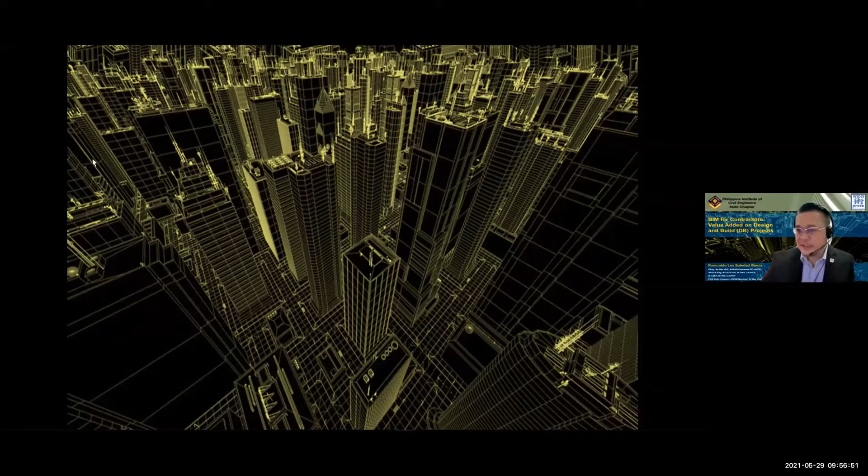Okay, again I'm Romualdo Lex Garcia. I'll be your speaker for this session. In addition to what Ma'am Marilu mentioned, I am currently the BIM manager. I have 15 years experience in oil and gas EPC projects, but I started actually as a shipbuilding and offshore design engineer, more on structural steel design. And eventually, I was able to gain experience not only in design, but also in structural fabrication and 3D modeling. Of course, we've been doing our design ever since 2006, using 3D softwares, although it varies from project to project, but we're emphasizing that one.

As we go along and progress in our career, we are able to experience how to handle a project and eventually develop more appreciation on how we're going to deal with various kinds of projects. I am a proud Agustinian. I graduated in 2005, and although I was a shipbuilding design engineer, I decided to pursue a Masters of Engineering in Structural Engineering in 2014, before I was offered a job in Malaysia as a senior structural designer for the first tension leg platform in the Sabah area.

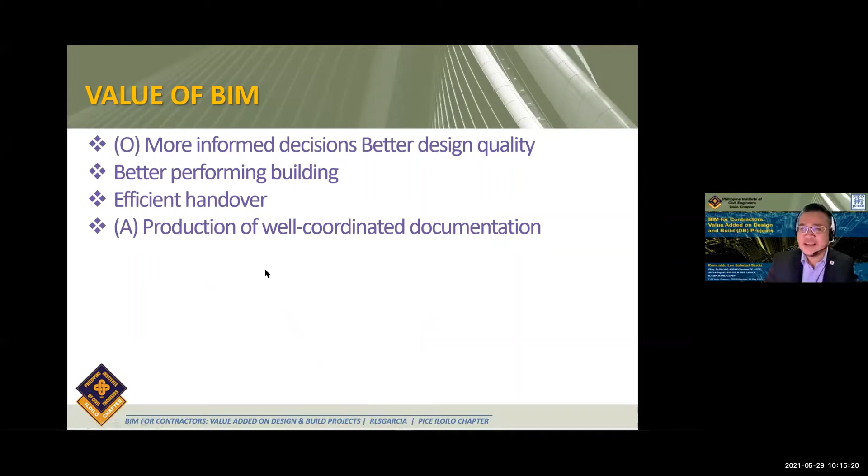Then, of course, efficient handover. If you have the CDE, the common data environment, the gathering of information from the start to end of the project is really, really efficient. Unlike the traditional practice, where gathering of info is really time consuming, so the efficiency is really low.

Then for Architecture, of course, the production of well-coordinated documentation. These documents are termed the drawings. So if you have a very good model and a very good site concept, you can create very good, well-documented, well-coordinated drawings.

Then you can also allow model checkers to assist quality control. Most of the time, that's why we're emphasizing the CDE. Our 3D model is accessible by all those professionals we highlighted earlier, but of course, limiting the access rights. If I'm a structural engineer and I need to see the architectural model, I can do that within that CDE.

So I can make a better and sound decision, especially on moving these columns or changing the sizes of these beams, and I could communicate well with other parties. So that is one good thing with this.

Then, study multiple design alternatives - this is the conceptual aspect. Then of course for structural, same thing: good structural drawings, integrated modeling analysis.

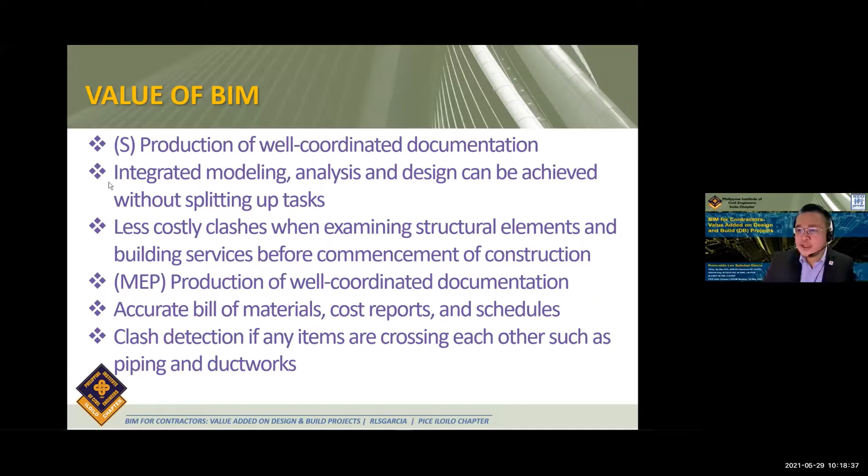So again, how did BIM evolve? It started from handwriting, then evolved into 2D CAD. During my university days, we were really fascinated with using AutoCAD during the second semester, after we struggled in our drawings or templates using handwritten hand drawings. Then eventually this evolved: 2D CAD, then Autodesk was able to offer 3D CAD. But this doesn't have any properties, so it is not really a smart object, just an object.

But eventually it evolved into BIM, where the lines could represent a beam. If you click on this beam, the actual sizes like H-beam 130, 150, or the angle, the I-beams, the channels, the purlins - it is really with properties. So that's the goal. Once you have that modeled with properties, definitely if your model is correct, you can generate a very good schedule, a very good material takeoff. So this is in brief the evolution of BIM.

So some of the advances, this one I presented last time: BIM coordination room, digital fabrication, 3D imaging using the LiDAR scanner, light detection and ranging. This captures as-built conditions for alteration works, or we could use this LiDAR scanner to compare our BIM model with the work in progress on site.

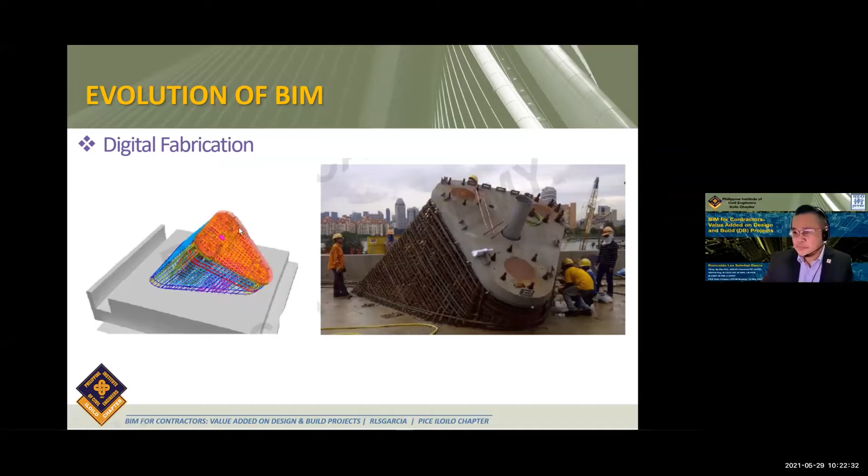Next, of course, we cannot pass through the BIM fundamentals without going through the BIM maturity levels. We have level 0, level 1, level 2, level 3, and level 4. I presented this to our company because many companies in Singapore are still not yet fully applying or adapting the BIM level. It's quite funny because even the managers were really dumbfounded. Only level 2 is quite difficult to reach already.

Because at level 3, you're already utilizing the cloud CDE, the processes, and 6D. So if your company, or the knowledge of your staff, is still in 2D and 3D, at least you're already in level 1. But if you're using BIM models, you're partly in level 2, but you need to utilize it in 4D and 5D to be a full-fledged level 2. So this is the main goal, the sustainability level 4.

As emphasized here, achieving digital sustainability through integrated BIM and smart FM, or facilities management, within an operational digital environment, or ODE. So this FM means you're utilizing your model to detect the level of gases, the level of liquid or oils that your plant is storing, or in houses, in condominiums, or what we call HDB here in Singapore.

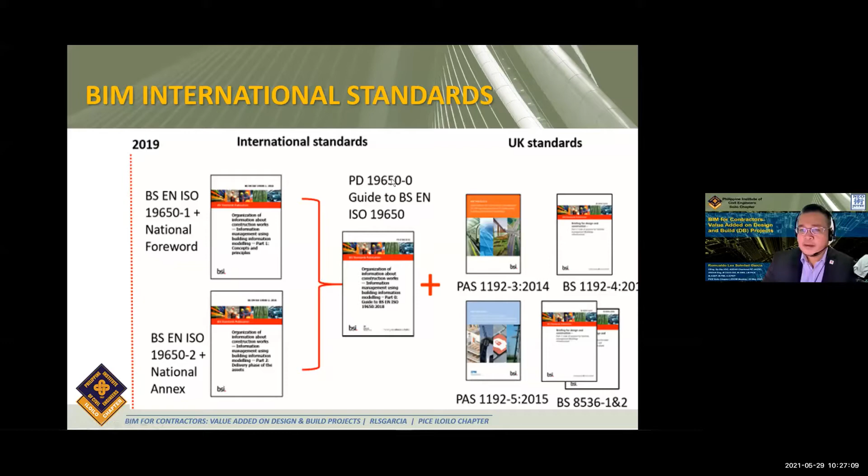So this ISO 19650 standard is an international standard for managing information over the whole life cycle of a built asset using building information modeling or BIM. It contains all the principles and high-level requirements as UK BIM framework and is closely aligned to UK 1192.

So if you're really interested in BIM, there's still so much to learn in this part of the industry, so try to be acquainted with ISO 19650.

Of course, Singapore has its own guide. They really provide everything for BIM practitioners so that they will no longer have much question. They have provided the BIM guide, and in general, the BIM essential guide for the BIM execution plan.

When I prepared the BEP, as mentioned earlier, this is the reference I used, covering the consultants, the architect, the contractors, etc.

So in today's presentation, I will be dealing more on the BIM Essential Guide for Contractors, and later on some inputs on DfMA, or Design for Manufacturing and Assembly. Just a short clip. Okay, so here's the roadmap.

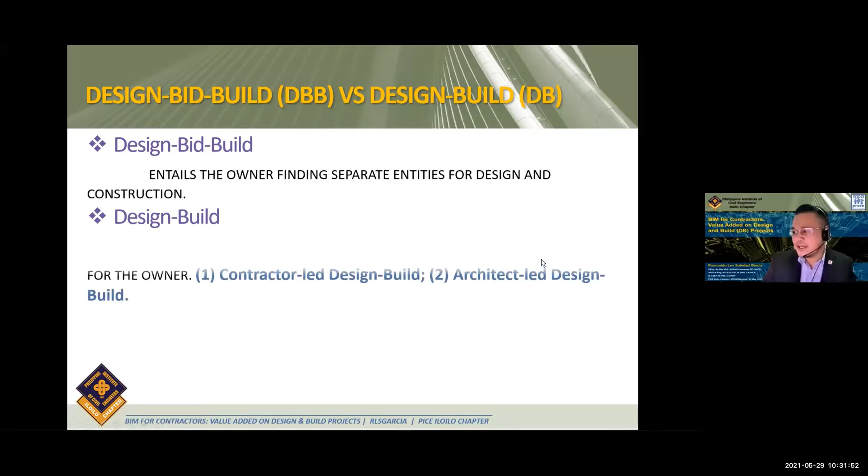But commonly now in Singapore is the design build. I'm emphasizing this especially to students — shout outs to our student participants there — you're going to meet this a lot when you're doing your work already as a professional.

Okay, design build combines the design and construction team with one point of contact for the owner. So in Singapore, we have two common design build setups: one where the contractor leads the project, and the second where the architect leads the project. Normally the architect here is the consultant, and they are the starting point of a lot of projects here.

So design and build is the method to deliver a project in which the design and construction services, again, are contracted by a single entity.

So it will be highlighted here in this next slide. For design and build, you've got the owner, then the design builder, which is normally a main contractor. Then if I am the main contractor, I will get a supplier or subcontractor, and sometimes I will hire the consultant or designers, but I am the main contractor — I'm the lead here.

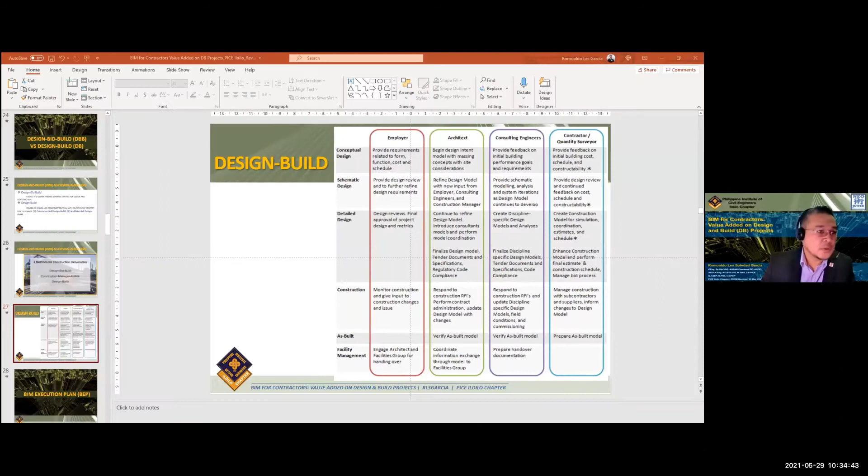Let me share a clip, but I think I forgot to share with sound. So let me close again. Then share. Oops, what happened? Then let me share with the sound on. Share sound. Okay.

So there are actually 3 different methodologies for design and building a project. The traditional method is design, bid, build, where you have an architectural engineering team design the project with the client, goes out for bid, and then the contractor constructs it.

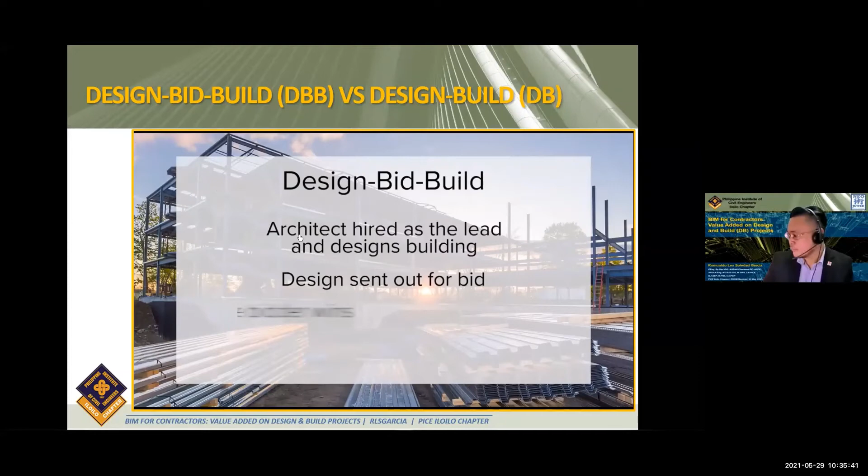The construction manager at risk is that the owner hires the architectural engineering team early in the design. They also hire essentially the general contractor, and they help shepherd the project through the design to value engineer and to get the most out of the owner's money.

The other is the design build method, where the contractor is the lead with the architect and engineer as a sub to the contractor, and the contract is between the owner and the contractor.

There are pros and cons to all 3. The construction manager at risk has been used quite a bit here in Virginia because it brings the contractor in early,

and what then they do is then they bid out to subcontractors. So we have their expertise on what's constructible and what's not, and trying to save the owner money. But then it's pretty much goes through the same design, bid, build flow.

So it was highlighted there, the same explanation that we had. The design and build, you only need one party as the main focal point before the owner. But the traditional one, design, bid, build, yeah, you need to contract a lot of parties.

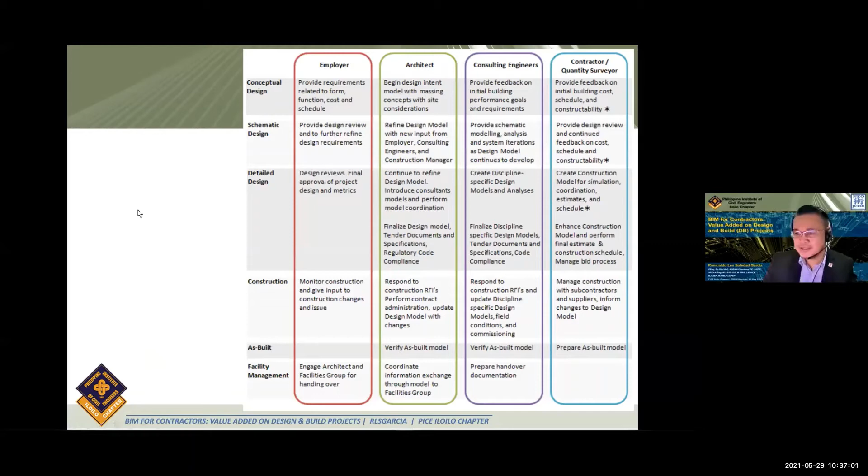Okay, so for design and build project in Singapore, these are the common roles and during the certain stages.

So we have this conceptual design, schematic design, detail design, construction, as built, facility management. So the role of the employer,

stated here, provide requirements. Also during the schematic, they do the design review. During detailed design, they do the design review as well and the approval.

So it's simply highlighted here that it is a smoother loop, meaning during our design build process for the

BIM workflow, especially employer, architect, consulting engineers, and contractors are more or less involved. Yeah, it is emphasized here, more or less involved during these stages of our project.

Again, BIM is starting to finish. Okay, from start to delivery or submission, even to the FM facilities management.

Okay, so we will not dwell more on this, but if you can see, even contractors are involved already in the concept design. How? They are providing feedback on the initial cost, the initial schedule, constructability.

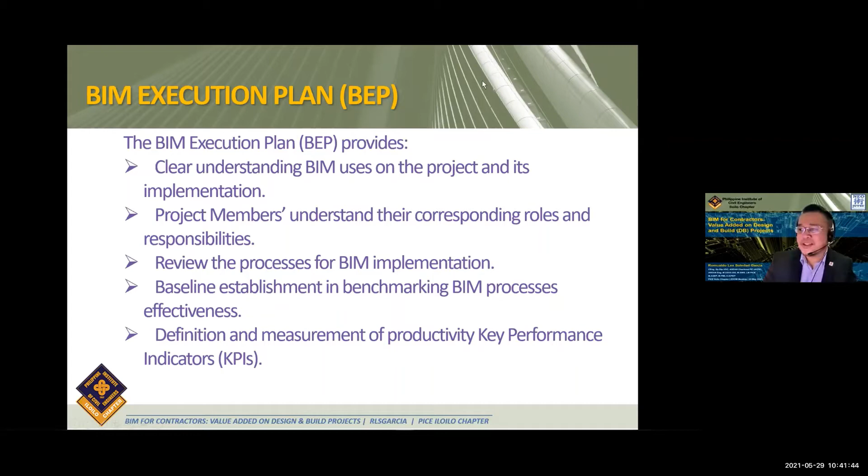So of course, since this is related to the digital aspect of the project, many info on PC specification, what kind of softwares based on the specs provided by the owner or the client should be included. So let's dive in here.

So let me share this one. Okay, so by now your screen should have this document. So this is our BIM execution plan, the BEP. This one we issued and accepted last July 2019. Let's go into the contents.

So for the content, we have the overview, the project information. We need to highlight the goals and the uses, the key milestones, the key project contacts, the BIM organization, and the basic org chart.

Usually, because it is very common practice here in Singapore and also in other parts of the world, we have subcontractors or freelancing or subcontracting modelers. So more or less the important thing, if you prepare this, you should know who's the BIM manager, who's the coordinator for your contract, and who's the system administrator if needed.

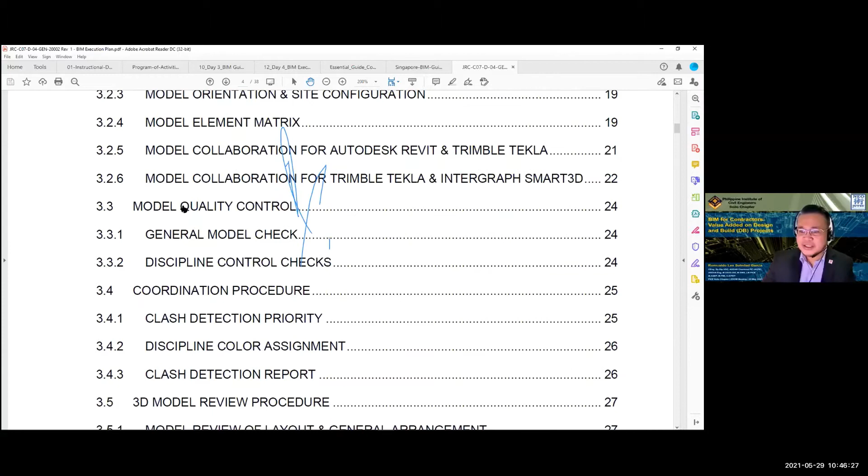Yeah, we need to have this model element matrix, collaboration, discipline control checking. So these are the QC, quality control. We should know also how to check, what to check when we receive these models. And of course, it is being highlighted when we are doing a BIM project.

We are really selling it as a well-coordinated project. So we need to have a coordination procedure on the clash detection priority. You can run a clash detection sequence and run a report, but if you have a very huge project, it will take a lot of time and a very strong PC. So you need to be very wise.

You need to be wise in selecting this clash detection procedure. So you have to prioritize. Then also the color assignment, the report, sample reports, you need to highlight more or less what you want to be done during the actual execution of the project. Then, of course, the model review procedure. Some projects do not require this, but for this certain project, the client requires a 3D model review procedure. So we need to have the review layout and arrangement, design considerations, etc.

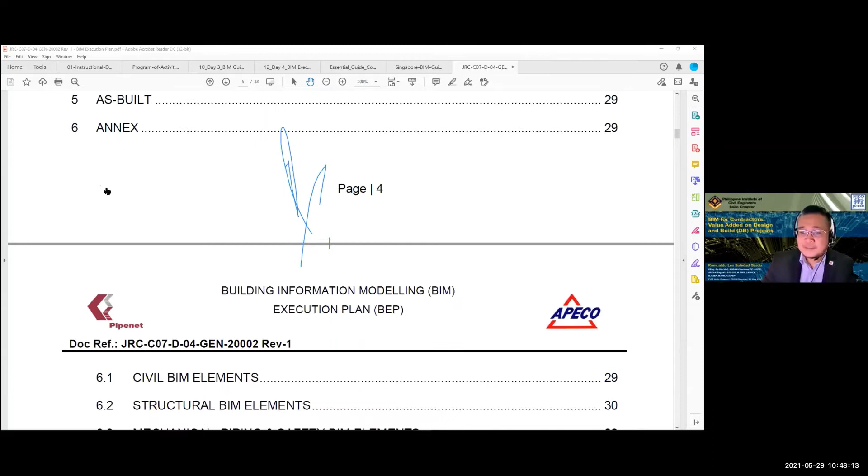This is the overview of the project, a description of what this project is about, what the goal is, and who are involved. Here we have mentioned that we're going to use a certain software and conduct model reviews at 30%, 60%, and 90% completion of the project. We need to highlight it here. This info came from the client, but we need to incorporate it here because that is our goal, more or less, using this document and the softwares, to comply with this requirement.

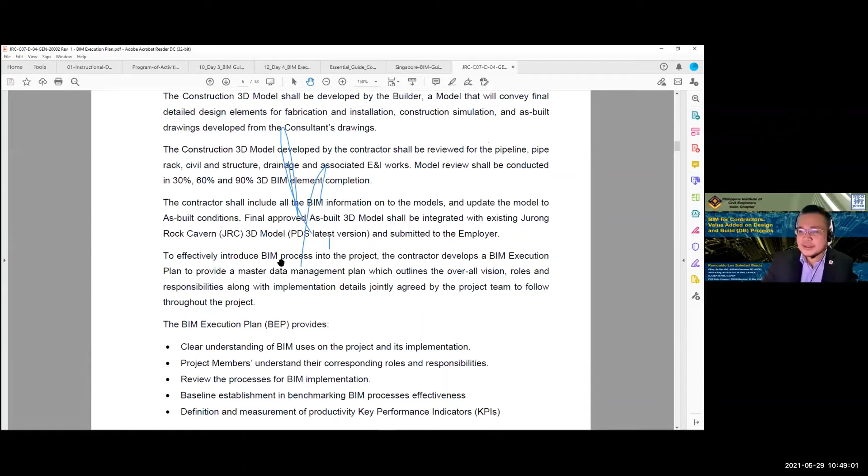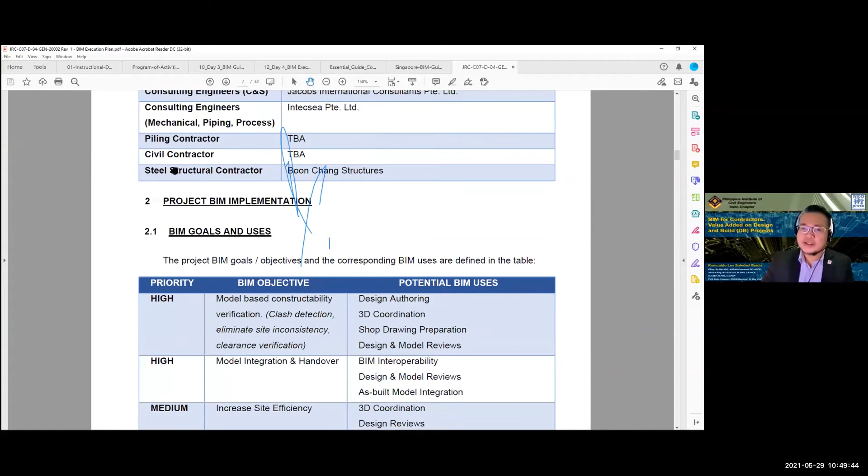Then you need to identify the consultants, etc., and also the BIM goals and uses. So this one, for example, for the BIM use, the goals and the uses, you have high priority on model-based constructability.

So the potential BIM uses are design authoring, 3D coordination, shop drawing preparation. That is just an example. Then one example of a low BIM goal and use is virtual site utilization planning and visualization. You're not really required to do that, but it is an add-on if you can.

So design reviews and phase planning. For example, if you have a Civil 3D model of your site, then you can do the cut and fill, and then analyze where to put your cranes, etc. That's one example, but for this project they are not requiring us to do that.

So we need to focus on those with high priority, meaning we need to focus on the valves, we need to focus on the detail of the structures because that's one of the high priorities. So here, the coordination, the shop drawings.

Going forward, we need to identify also the key milestones. So these are some of the key milestones that we have: now we have the authority submission, the implementation, construction phases, etc. Just a table, so at one glance the team or the PMT could identify what the milestones are.

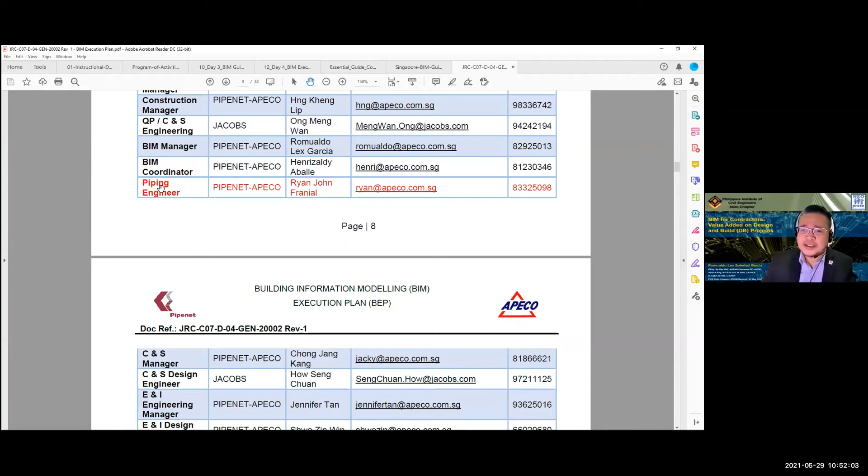Then of course you need the contact info: who are the director, the assistant director, BIM manager, etc. Also who are your consultants, MEP, C&S, etc.

Then the org chart, again just highlighted here only the manager and coordinators because we are outsourcing. We are giving the modeling of the majority of our structures to our fabricator. So here only the BIM manager and the coordinator are mentioned, of course with their corresponding role.

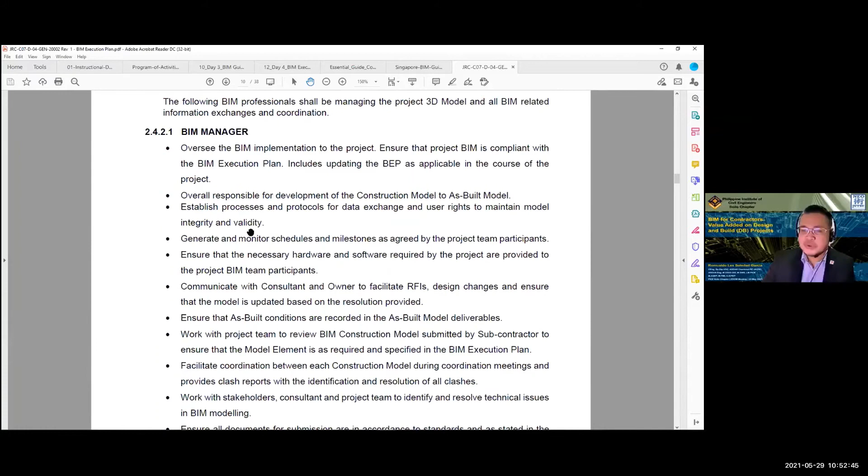Then here in sentence or paragraph form, you need to identify what the roles of a BIM manager are. These are the roles of a BIM manager, you should indicate that. Same in your project brief, you identify the PM role.

Also the coordinator, for example, utilizes the BIM to perform drawing and design work, because most of the time the coordinator is also part of the modeling team. They facilitate coordination between the construction model, and also they conduct collaboration exchanges of the model data between the consultants and contractors. So also they are assigned to do the model review.

And for our project, since we are going to have a server, we need to have a system administrator because we have specific software for this project. So we need to have an admin. So these are the roles, we need to identify that as well in our execution plan.

Then the workflow. We need to provide a very good picture of what's going to be the workflow in our project.

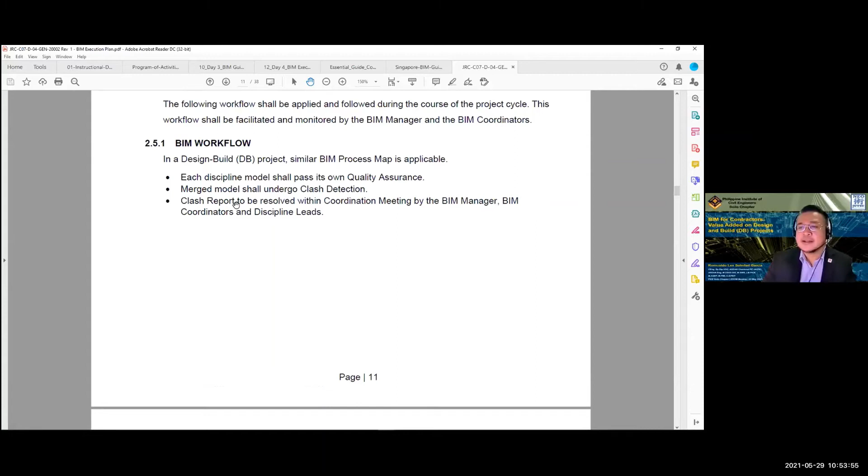So here, highlighted in a design and build project, similar processes are applicable. Each discipline shall pass its own QA, must undergo clash detection, and clash reports need to be resolved within a coordination meeting by the BIM manager, coordinators, and discipline leads.

This is the same as mentioned in the statement above. So internally, you proceed to the merge or integrated model, then conduct a clash report or clash checking, then have the coordination meeting, eventually leading to a coordinated model for construction.

As long as these clashes are not resolved, your coordinated model is not 100%. So you need to go through the same process again until it reaches no more clashes.

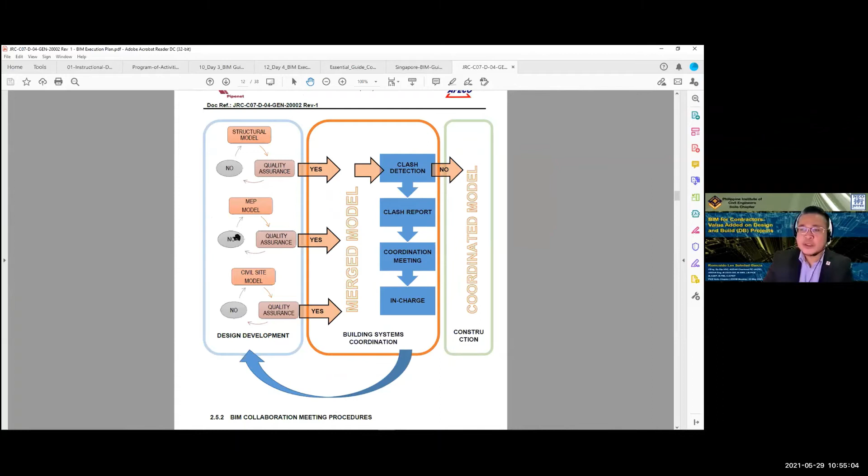That's the flow. So this document, again, BEP is a live document. You can update anytime if needed. For example, we don't need an admin, we need only a software modeler or a backup one, so we need to identify it here. Or we need an additional coordinator. You update as well.

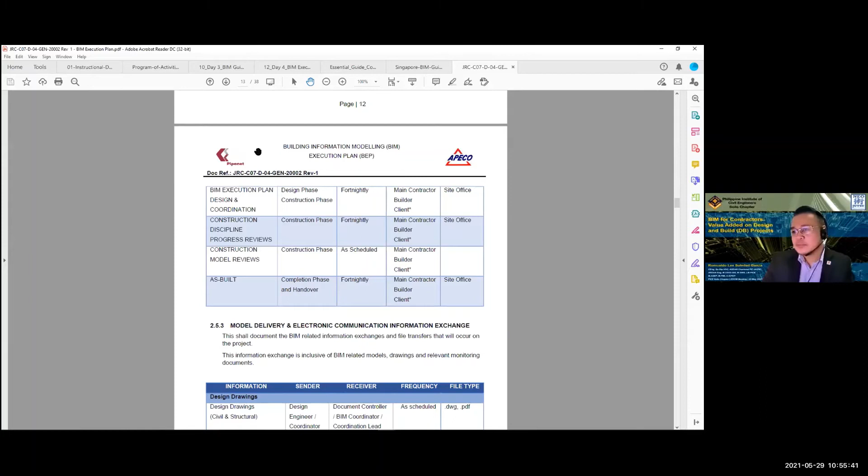So here are the schedules of the coordination meeting, the collaboration meeting. Fortnightly, every 2 weeks mostly. You provide the location, etc., and identify the electronic communication information exchanges, the file type, who's the sender, who's the receiver, and how often.

Usually this is advised weekly, especially if your client is keen to see weekly progress, especially in your 3D model. Then you have to do it scheduled weekly. You need to freeze the model, then send it out. You need to include this in the BEP.

For the drawings, since these are really used by the construction team on site, they are usually received earlier. Then the model, although supposed to be ready, needs some clash detection, etc. So these are scheduled separately, and the file types are different - maybe IFC, STP, or Revit, NWD - all for integration so we can conduct the model review.

Then of course, as mentioned, we need to provide the infrastructure requirements - the hardware, the workstation, and the server.

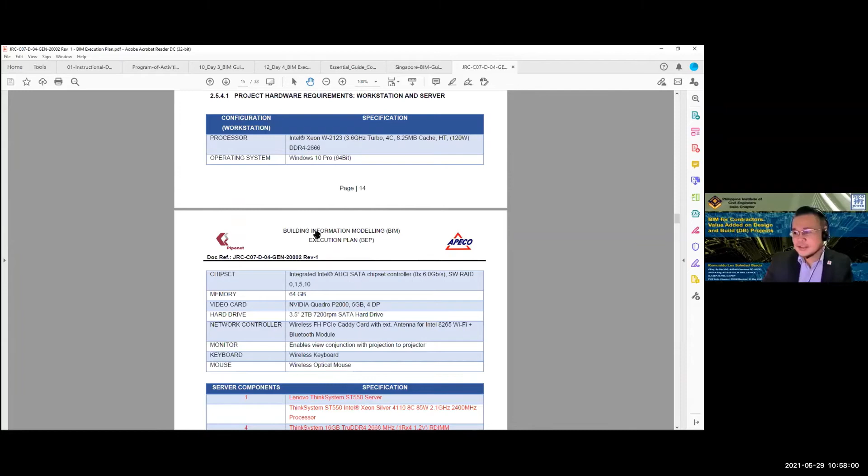Eventually, they select whatever vendor they've chosen. But as the BIM manager, we're the ones giving them suggestions on this, and we also decide on the server specs. It's really good if you're familiar with or have an IT friend you can consult with before contacting a vendor, so at least you have a better idea.

We also need to do a lot of research - if the Intel Xeon Silver is enough, or do we need a memory card for this server alone, or do we even need this server at all, and how many. Also, because the project requires a lot of software, you need to identify it here as well.

For this specific project, we use Revit 2019, but actually we upgrade annually. Then you need to have the format - we need to highlight the format because that's going to be used for data exchange later. For the MEP, we're using Hexagon PPM Smart 3D. For the analysis, we have CAESAR II and Pipesim. For the surge analysis, we have Pipenet.

For structure, we have Tekla Structures - it doesn't mention it, but it's supposed to be STAAD. We're using STAAD and ETABS for the ground, but it should be highlighted here. Then also for model coordination, what are we going to use - Navisworks, Tekla, or for the fabrication drawing - Navisworks, Tekla, Revit, etc.

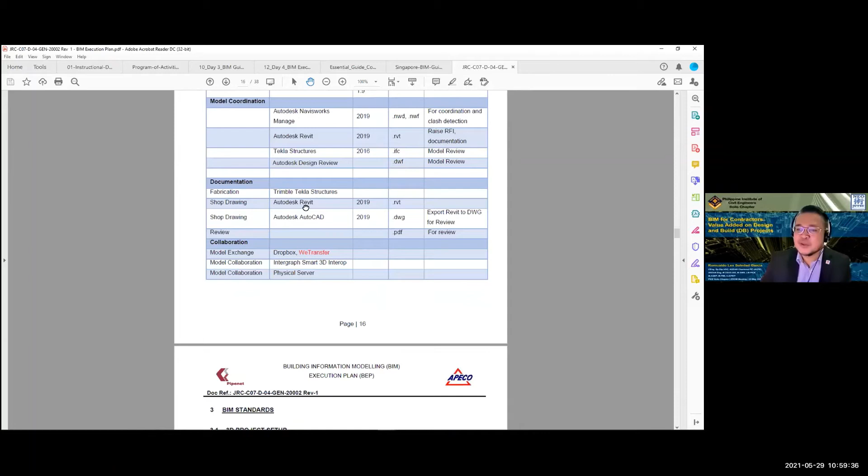And for the exchanges, we can use Dropbox, WeTransfer, Interop, and the physical server. So whatever software you're going to utilize in your project, you need to have it here, enumerated there.

So of course you need to set up a standard naming convention. Most projects have this, how to name your project. Then you have this code for electrical, HVAC, etc.

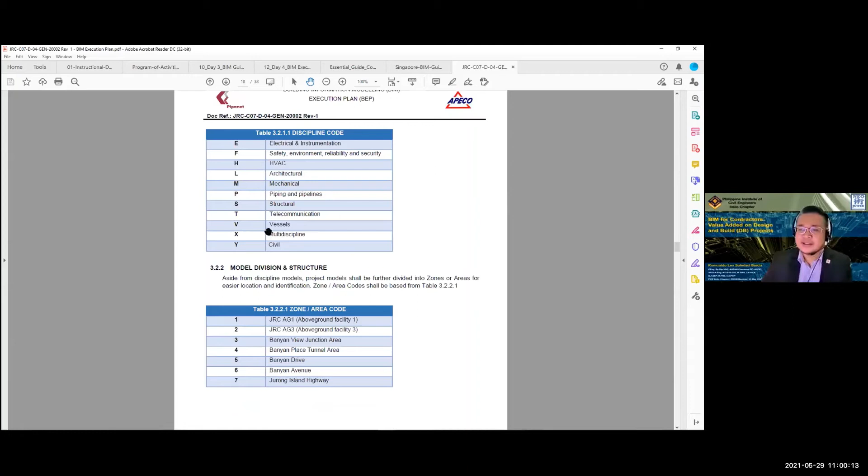Then for the model, you have the zoning, so that you won't have a very huge size model during your integration. Normally one model will have, in our case this is the old one, we had 7 during that time. But I think we're nearing completion, we already have 12, around 12, because we have additional ones.

Sometimes we encounter VO, or variation orders. So yeah, this is one of the most important things.

If you're using Revit especially and Tekla, you need to have the project base point. So during integration you will have a very easy bolt-in of your various models using various softwares, because you have a specific project base point. This is identifying the northing, the easting, the elevation, and the angle from true north. So you need to have this here.

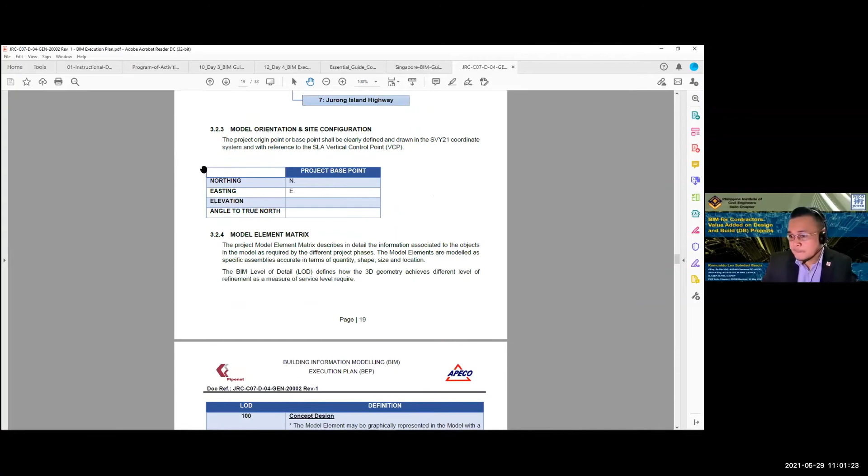Then the model matrices, the LOD. These are just descriptions of what is LOD 100. So LOD is level of detail, BIM level of detail.

So if it is only 100, normally that is during concept design. During schematic design you have LOD 200. And if you're going to have the detailed design, it's LOD 300, and so on. So for construction, most of the time, especially for those models with rebars, for example, and your client requires it, you need to have 350, LOD 350. You need to show those rebars.

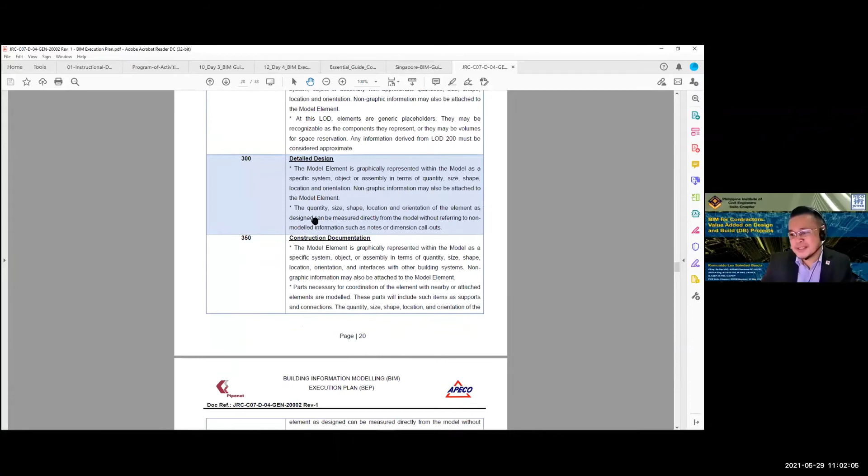Okay, going through. So these are the procedures on how we're going to collaborate between Revit and Tekla. So as the lead of the project, you should know how to operate this, and place it here in this document.

So the linking. We're using Tekla, and also we have Smart 3D, a different software again, different for piping, different for structural.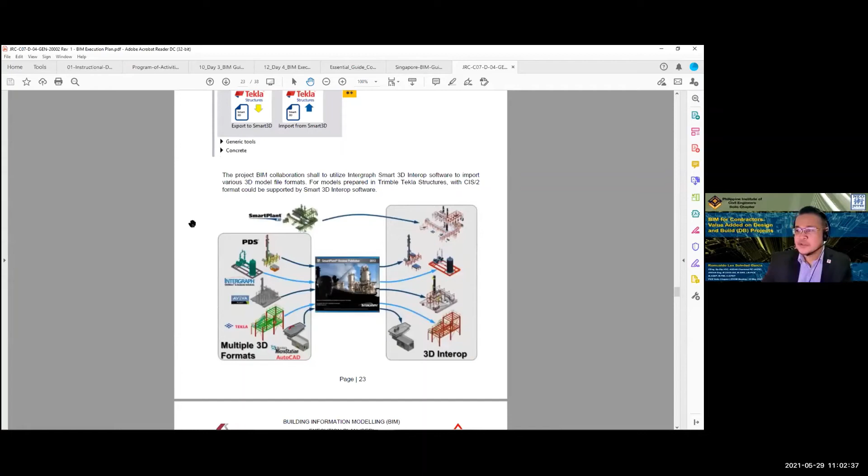So the model checking, we need to have identified visual check, interference check, etc. And the control checking, you need to have that specified as well. So the clash detection priority, this one I explained earlier.

So for example, you have the civil model, the structural model, MEP. Civil normally these are the substructures, the pile caps, the piling, or the slabs. Then you have the structural model, like the structures. We call this civil the substructure. On top of that are the superstructure model, which we then merge with the MEP.

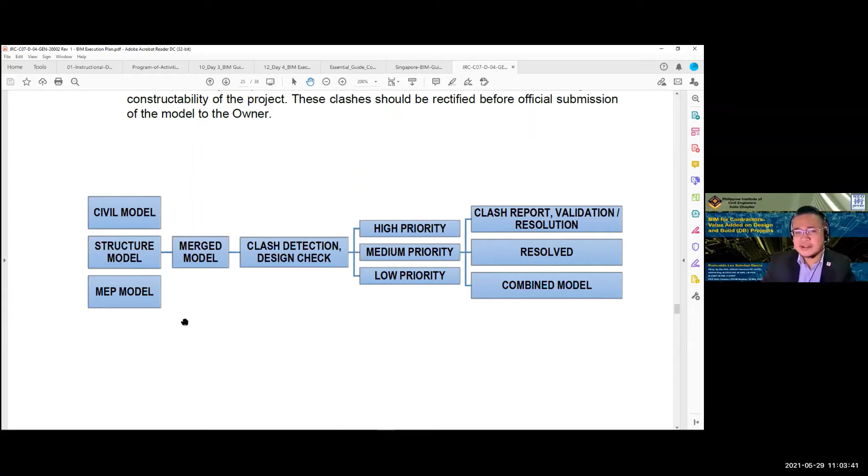MEP is mechanical, electrical, and piping, but some projects call this differently. Because some pipings, especially on large projects, they differentiate the HVAC if they have it. But for the piping, they call it services. So that's part also of your model checking.

Then you merge, then you have the clash detection, design check, then you identify which ones are the priority, medium, low. Then you have the resolution and you combine into your construction model, or the federated model, as we call it.

Then of course the color coding, this is quite normal in any project. And okay, this is the report.

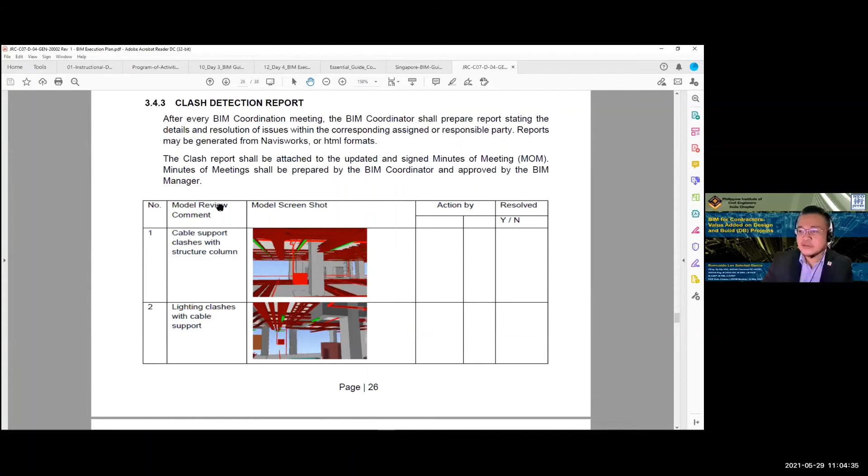You need to, especially our client, they really wanted to know what's going to be your format when you're going to have the report. So we need to come up with this one, even though we haven't started yet. If you have a lot of projects already, then you can have your own template, company template from your PMO, project management office, so you can have these templates if needed.

So these are the sample clash reports and how it's going to be resolved. Some of these descriptions, hard clash, then you have the clash point, usually coordinates. Then normally we have the closeout, but for our closeout reports during model review, we only have two columns for screenshot 1 and screenshot 2, then our response. Normally that's what we do for the project.

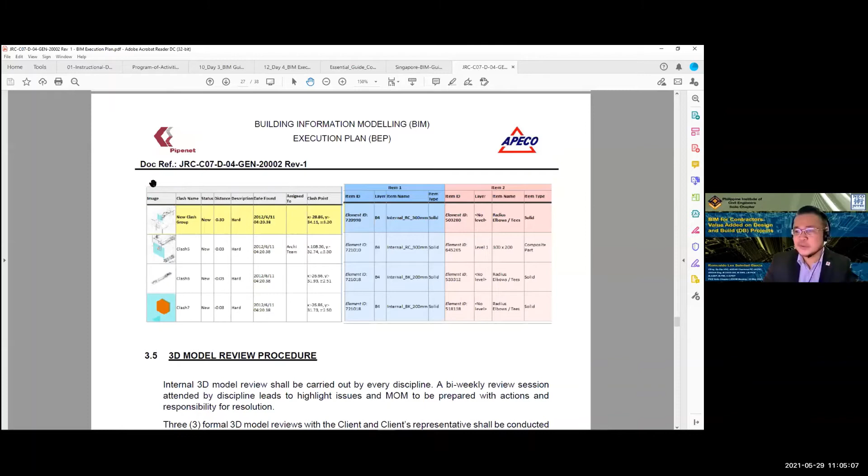And it was accepted. So the model review procedure, you need to identify as well. So a lot of this. Then zoning. So that's it, you have a lot of info within this BEP.

So this part here, these are the color coding normally. Okay, you have the text for your naming, agitator, blowers, buildings, columns, etc. So that's it, you need to identify.

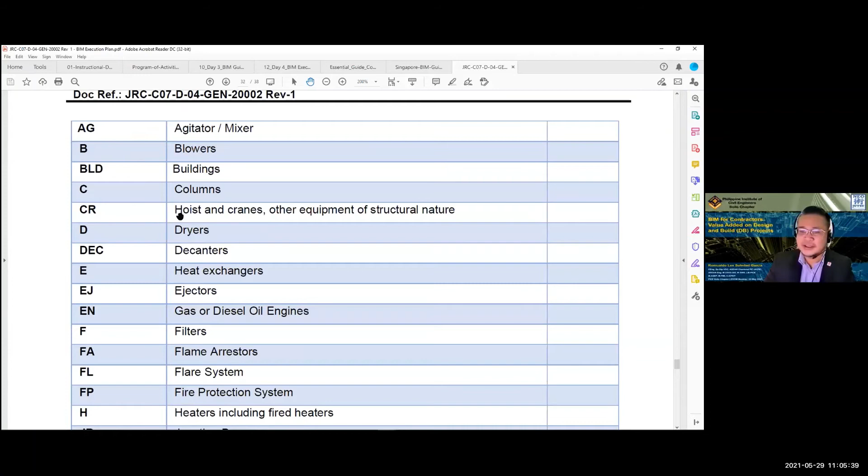These are appendices. Some of this we can copy, or we should copy, refer from the Singapore BIM guide. Hopefully we can create, I think it is in process, we have the Philippine BIM guide being prepared as well.

Okay, so much for this. Let me share again, go back to our slide. I hope everyone is still awake. Okay.

Okay, you're good na, engineer? No, we're still midway. All right. Okay.

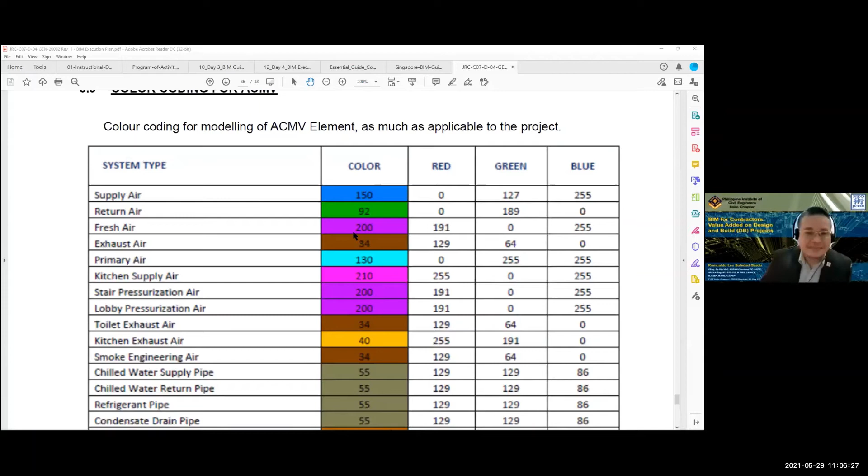So, one example of that is for the BEP. Then let's proceed with the BIM VDC workflow for a C&S design and build project.

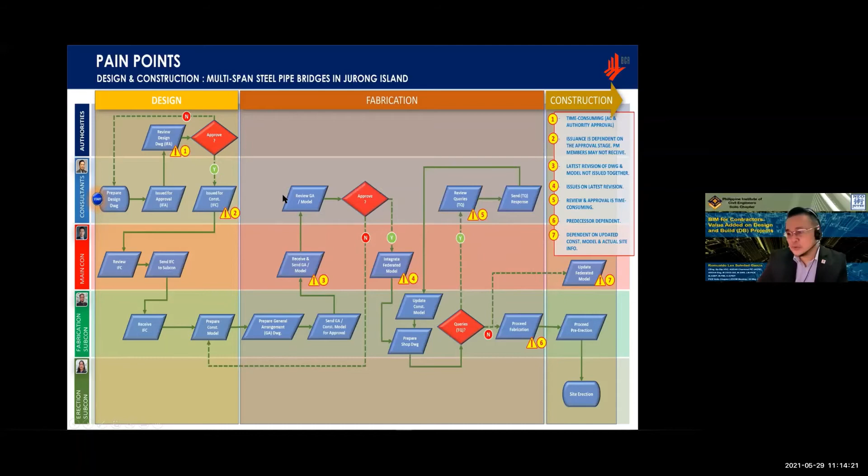So again, just sharing with you, this is the workflow of our design and construction of multi-span steel pipe bridges, to proceed. That is actually one of the activities when you're doing VDC. Take note, we're dealing with models, we're dealing with common data environments, etc. But as contractors, we could do so much more, but there are project constraints. Okay, for BIM contractors, here we go.

This is, I think I was able to share this before. So Philippines is not yet included in the adoption of BIM. A lot of organizations are already pushing, especially the PCA, Contractors Association, also in coordination with the DPWH. They're preparing. So many documents are being prepared already, a lot of proposals are being prepared already. Some of our projects in the Philippines are already using BIM, but how come we're not yet on the map?

Especially since many talents are already there in the Philippines. It is simply because some of the projects being catered to are abroad as well, and also some of our local projects are using talents from abroad. So that's why we haven't launched yet - we haven't placed our country on the BIM map. So that's one of our goals here, to educate even our young professionals, our students, our graduating students.

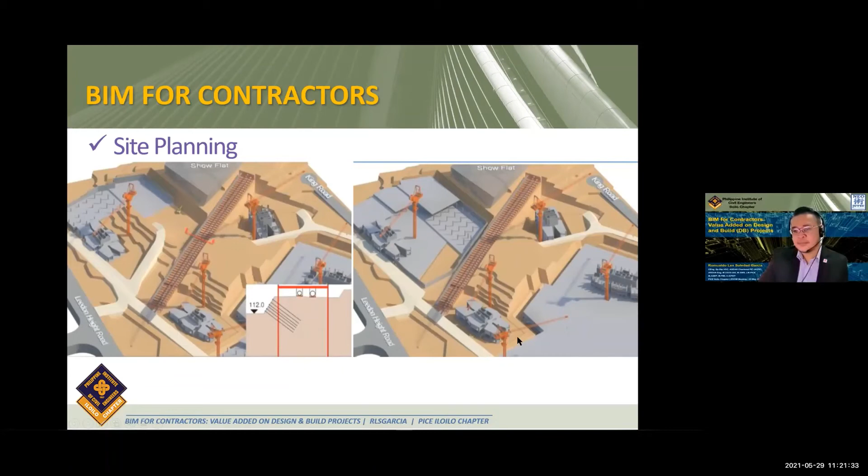And constructability review, of course - you don't want to waste your time doing reworks on site. So upon inspection of the model, maybe you can adjust, especially if you have this knowledge in construction sequence or construction.

That's why it's really a good thing, as highlighted by Sir Erdsan earlier - it's really the people. Even though we have these tools, even though we have this technology, it's still the people who are going to decide. If you don't have the knowledge that this could be converted into this, meaning the connection would be different, then you cannot suggest, even though how much you're going to look at your model, if you don't know this process. So experience really helps, knowledge helps.

But of course, efficiency would be increased if you utilize this software. But still, we're the main ones - the persons, the engineers, the architects, the MEP professionals. Okay, that is for constructibility review.

Another thing, construction detailing, of course - see, this is a product of Tekla. I think I grabbed this one from Tekla, yeah, because I'm really amazed with how detailed this rebar work is here. So of course you can generate very good documentation, shop drawings from these models because they are automated.

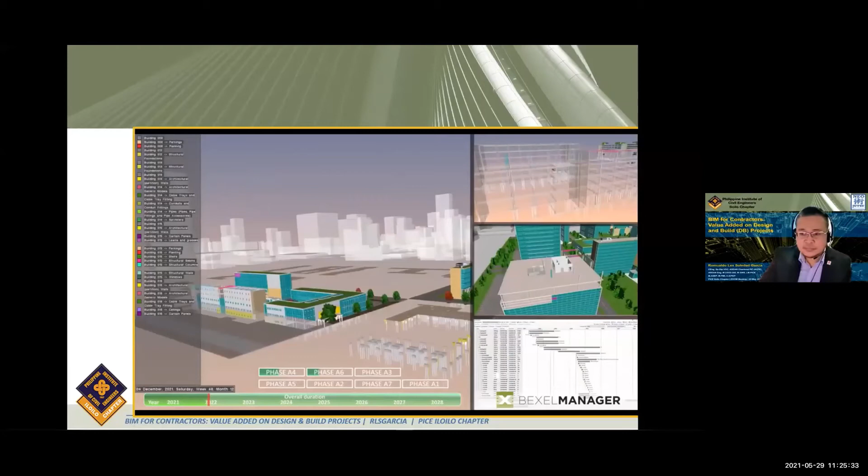Okay, this is using Bexel Manager. Bexel Manager is suitable for contractors and project management. We can have the 4D and 5D using this. So I'll just push forward, just highlighting some of the software that we can use.

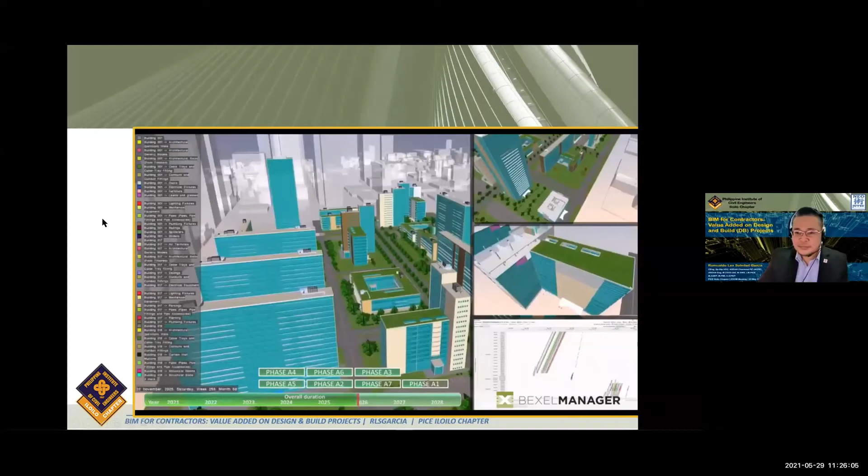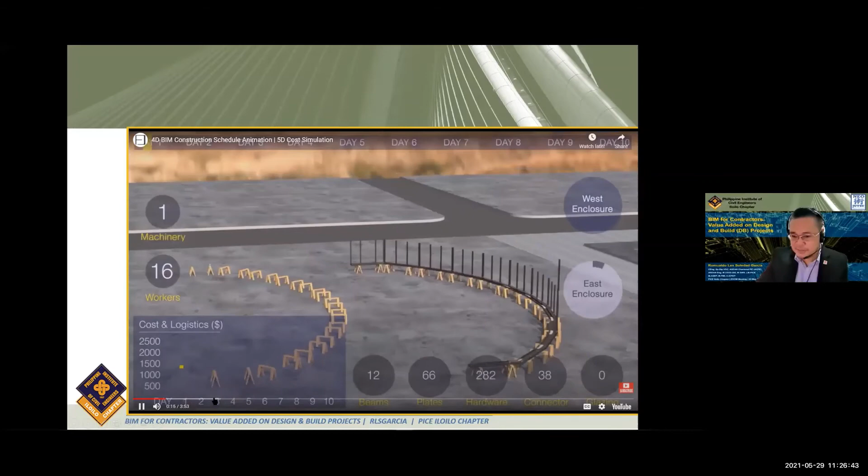Okay, then here's another one. This is a bit cheaper software. Very good animation, so the client really appreciates how the project management team presented. This is just a short clip. For this case, we have the costing here, the logistics, how many workers, how many machinery they have. So this is just one example, just to give everyone an idea.

Notice here the workers, machineries are being monitored, and the costing is being monitored as well. So the placement of the domes and the frames.

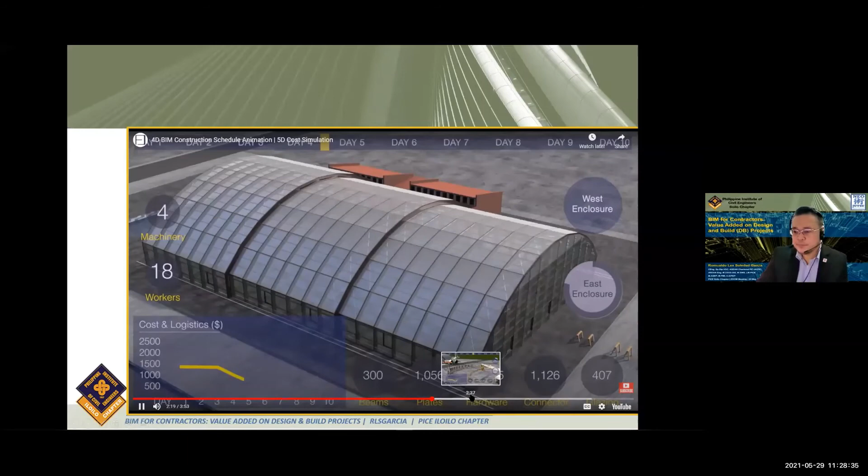So let me just forward this. If you notice, you have an assembly line here just close to your actual site area. So that is pre-erection or assembly, then pre-erection, lifting, then readjustment. So cool.

Okay, then that is another software, Bexel. That one is the 4D simulator. Then of course, one of the most commonly used because it's quite cheap, Autodesk Navisworks. So let me play this for you.

So this is just a 1 minute clip. I think we're still on time. So this is one example of a 4D simulation.

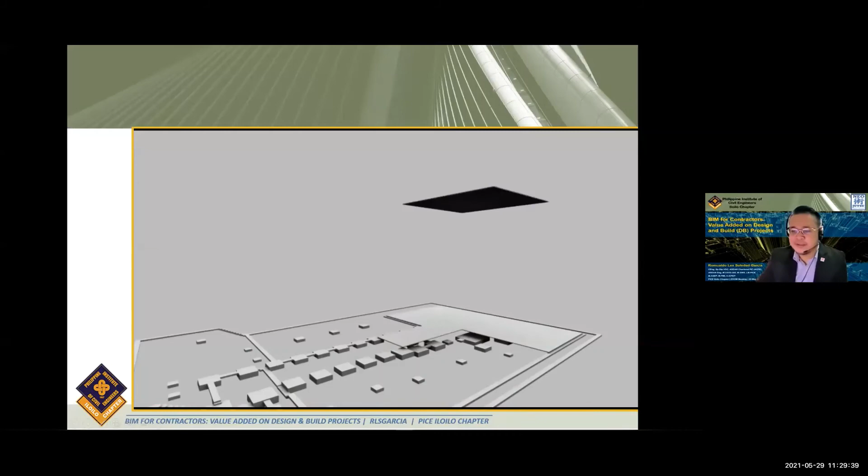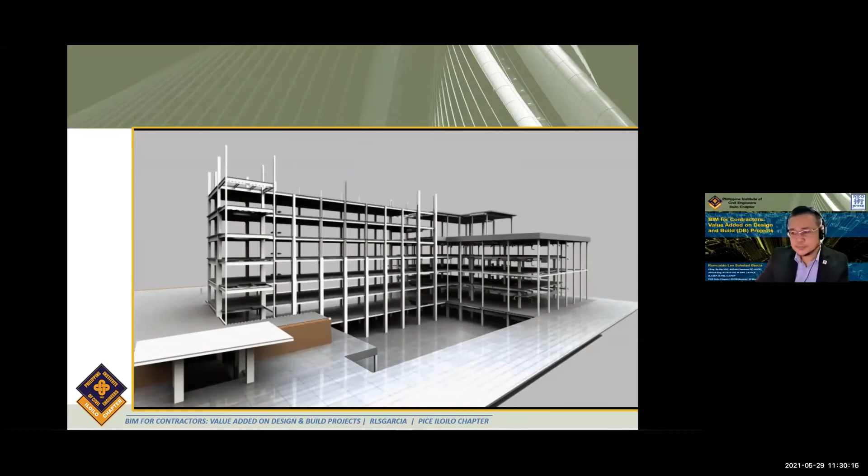Later on, I'm going to show everyone just a quick procedure on how to utilize Navisworks to create such animation, just a basic one, how we're going to connect the object, the 3D object, to the schedule. We're going to see that one later, that's why we're highlighting this software as well. Since this is one of the most commonly used software, I will be highlighting a quick procedure on how to prepare 4D, 5D, and clash detection using this software.

Okay, so now proceeding with the Navisworks 4D simulation timeliner. 4D again is 3D plus scheduling data. We are highlighting this because these are part of the add-ons, the value you can add to your project, especially if you are a contractor. So 4D is the scheduling data or the construction sequence added to the components, which will build in detail as the project progresses. This helps in the actual program information, the visualization showing how the project develops. So I have 3 buttons here.

We'll just fast forward this. These are the workshop clips I prepared during my Navisworks workshop here in Singapore I have conducted. So is it showing? Okay, so it means I need to have that one as new share.

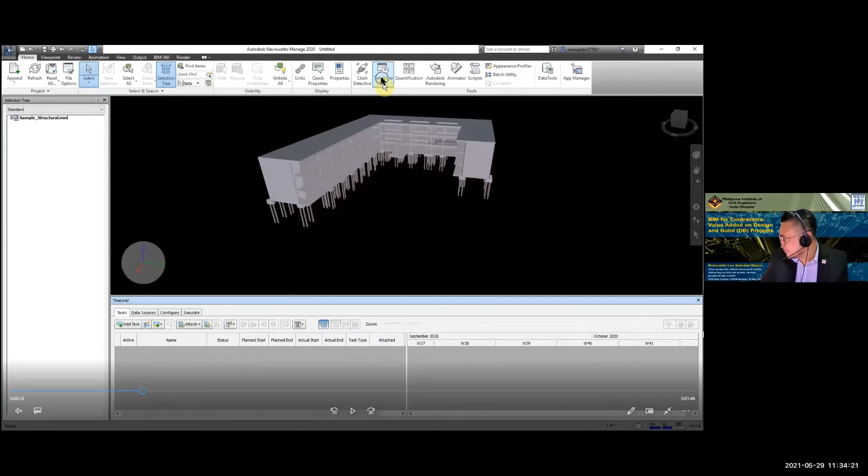Then opening this selection tree on top, opening the selection tree here. Then we'll open the timeliner here. If you can see my mouse arrow blinking, so that is the timeliner. Then we will connect the object, which is here in the tree, on the left side, with our schedule. So we can have the option of data source, then we have the configuration, then the simulation.

Later on, our main goal is to have this animated using our schedule. So appearance definition, just identify the colors, etc. For example, when it is being constructed, then once it is constructed, it's going to be solid color. Then the appearance, just changing this, because we're aiming for a good animation. Okay, then renaming the appearance.

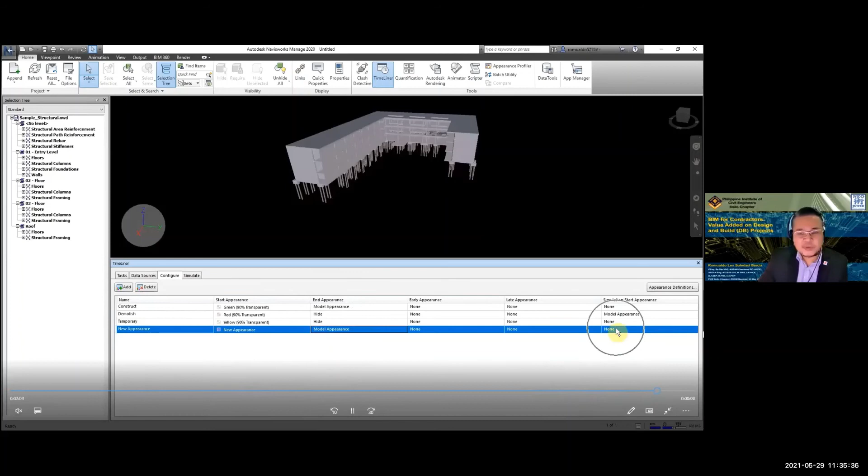Then the start appearance and the end appearance. Okay, so that is clip number 1. Now, for clip number 2...

We already have this, no, this doesn't have any audio. So...

Now we're going to key in the data source. Interestingly, it is still blank, but we're going to connect the schedule. So we add the task as highlighted. For the data source, we're going to pick. So we have the option here to select a project, Microsoft Project, or an Excel file, .csv. For this example, we have the sample structural. Then we'll just change some of these names here.

The goal of this clip is for us to see how we're going to connect the schedule that we have. So remember, we already placed in a schedule in an Excel sheet. So this is 7 minutes, let's just fast forward.

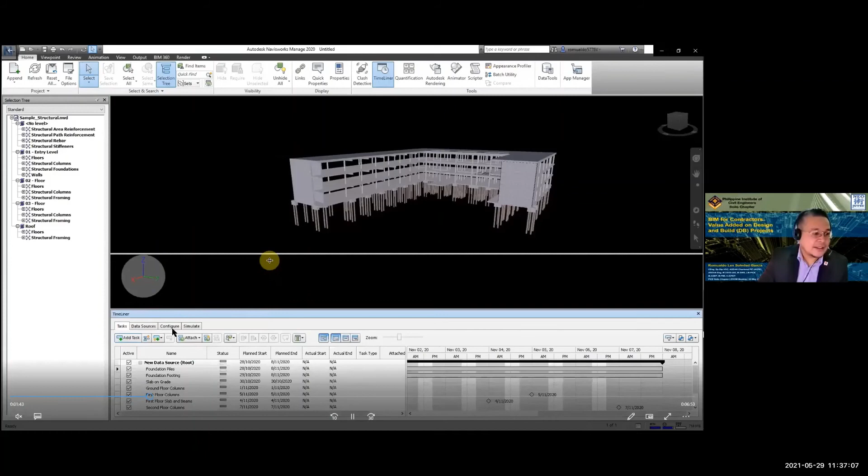So you rebuild the task hierarchy. Once you key in that one, it should be propagated here. Once you place the task, these are the content of your Excel file: the foundation piles, footing, etc. Now, we're going to connect this to your 3D objects.

If you notice, you have the plan start, the plan finish. You also have here the animation on the right side. So as long as your task is changed to construct, it will later on show as a clip, because those are the task type also of your model.

Okay, then we will attach the objects. Let me just fast forward. Going to home, you have the selection tree. Now, clicking on, I think we started here with column, then you can pick one by one, or you can select the same here on top.

So if you notice, you just simply click here on the tree, then all of your piles are selected. Then once that is okay, you save the selection set, then you rename it. So we rename it piles.

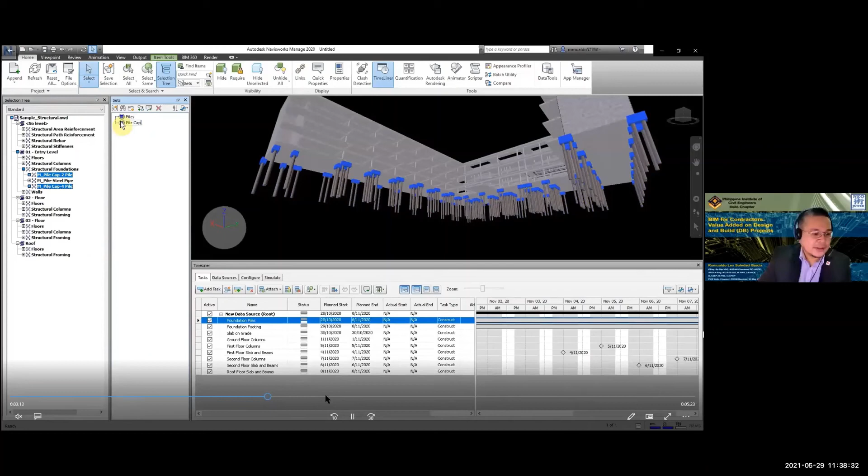Then we will have another selection set for the pile caps and so on. Once we're done, let me forward so that we can cover more. We need to have this group and save it, so save selections. Then later on, we will have that one matched. Okay, I'm going to forward this.

So if you notice, you already have a set for piles, pile caps, slab on grade, ground floor columns, etc., and your schedule or the task here are prepared already. Now we will just simply attach those selection sets. Let me go to the attachment of the selection set.

Okay, here. Take a look at this part here. Attach, just simply click, then attach set. Those are prepared already by you: pile caps and so on. Okay, so you see you already have your schedule and your attachment of your model is being done.

So this clip shows that. We'll just let him finish, and after that is done, you can run your simulation later.

So the schedule, then you can simulate. So simulate, it is already running.

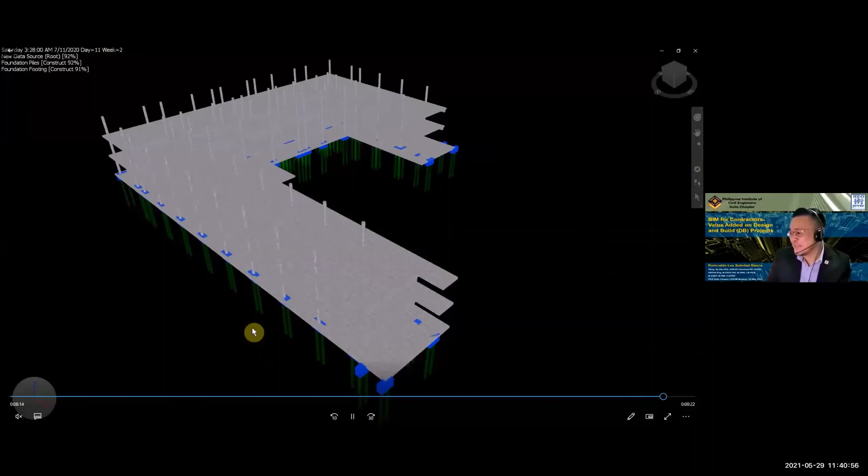Okay, that's it, let me end this one. And let me share again our main slide. Okay, I hope you enjoyed that simulation. Okay, it's not yet done.

Okay, so moving forward, 5D BIM. I think we don't have much time, so we'll just end here for the discussion. But for 5D BIM, I will not show the simulation, but this is how you prepare it.

You have a model, then you also have, you can have the takeoff and export it to your Excel. And I want to highlight the clash detective, or the clash checking. So I only have one video here, I hope. Okay, with the clash results, so let me play this and share that again.

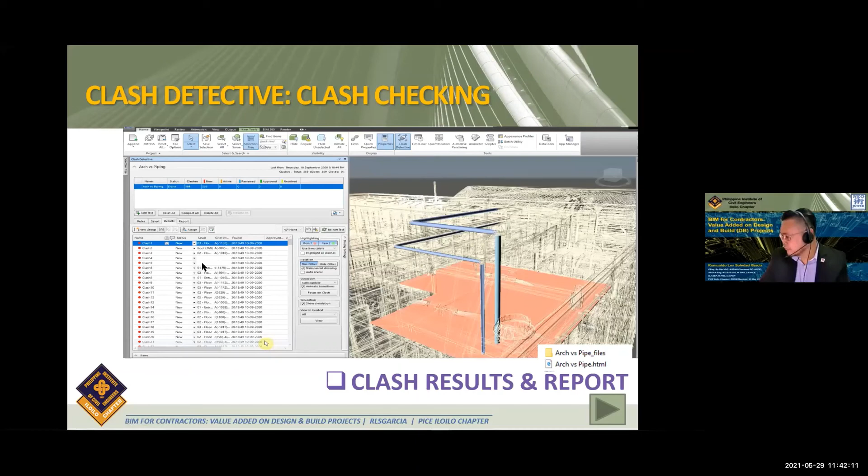Okay, so the model is showing. So I think in this model we have three disciplines: the structure, the piping. But for this specific example, we're going to have between MEP. So we have three, Archi, MEP. So setting out our test, we're going to compare the workshop model.

So we're simply selecting the discipline that we want to have the clash checked. Let me forward this. So in selection A, we have selected Archi. In selection B here, we're going to select this pipe, which is under the MEP.

Since it has too many, we'll just select the same and same type. So it will be highlighted. Then use the current selection and it will be highlighted here in the selection B tab. Then run, so we need to change the clearance.

We can identify 10 mm clearance, etc. We can highlight that one. Okay, then, oops, too much.

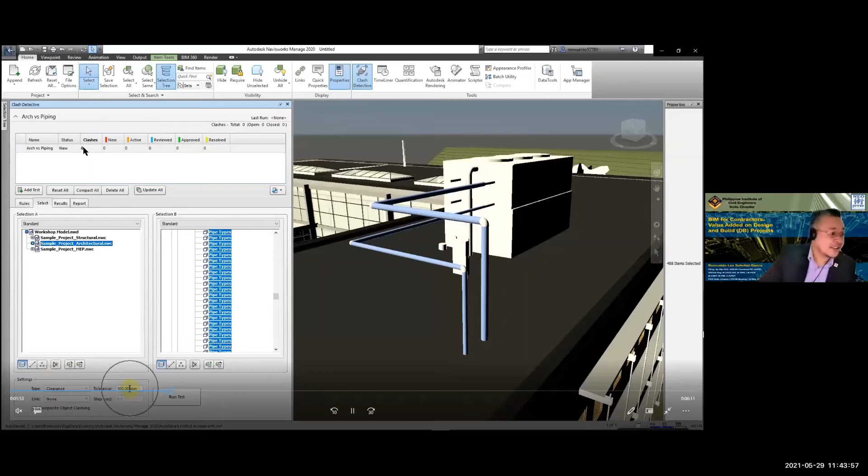Okay, so once that is run, we're going to have this report. Based on this one, the number of clashes are 359. So you can highlight this in the model, then you can hide as well.

Then of course, what's the use of this if you cannot export this one to a report? So once seeing this, we can have that. Then later on, all these clashes we can export to a report and assign whoever should be the one addressing this or closing this.

So that is just an example of a clash report, clash checking using our Navisworks.

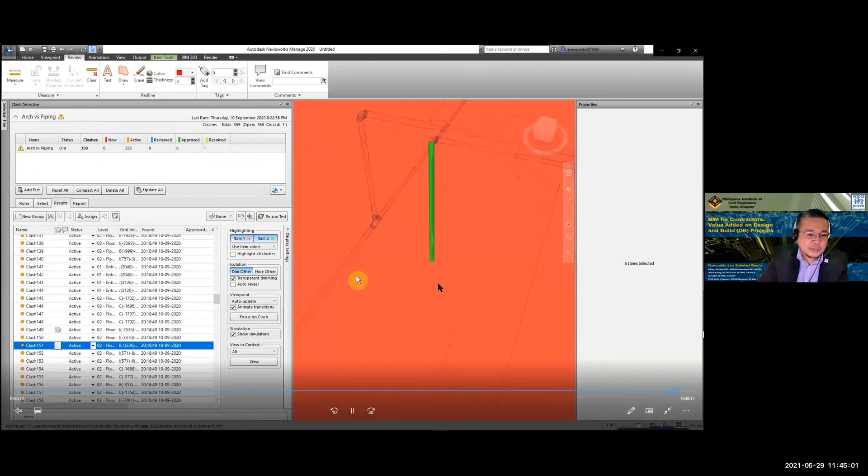Then actually we can export the report here. Of course, the status also you can change. What's important here is you can export this once you have run the clash report. You can export that one to Excel or HTML.

Okay, so that's it. Then let me go back to our slides. We're almost done.

Okay, for the meetings and model reviews, we will not go further. We have highlighted this already during our tour in the BEP. So we identified the meetings, the coordination meetings, and their importance.

So of course, the model reviews. We can use a lot of tools, but most of the time in our company, in our project, we are using the Navisworks Manage to conduct a model review.

So BIM to Field, this is another add-on or another additional value added to using BIM for contractors. So let me play this.

What on earth is BIM to Field? Well, we're going to tell you in this video, but first, it's important to understand BIM itself. Here's a quick recap.

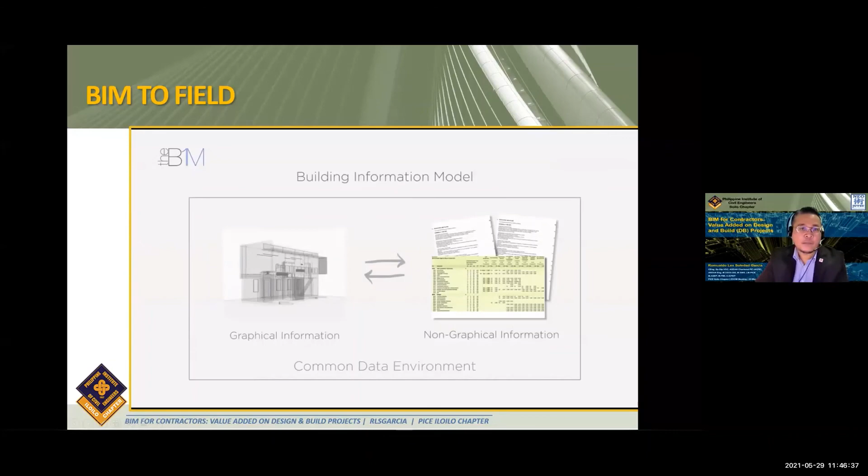BIM is the process of creating information models or data sets formed of graphical and non-graphical information in a shared digital space known as a common data environment. The information builds in richness as the project stages progress until that complete data set is handed over to the client at completion. Information models give project teams highly accurate, well-structured and coordinated data about the assets they are designing, constructing and maintaining, whether that's a road, a railway, a structure or a building. That data can be used to support takeoff and pricing, programming, or for developing fabrication plans, amongst many other things. Working in this way enables proposals to be tested and honed virtually first, before heading out to site.

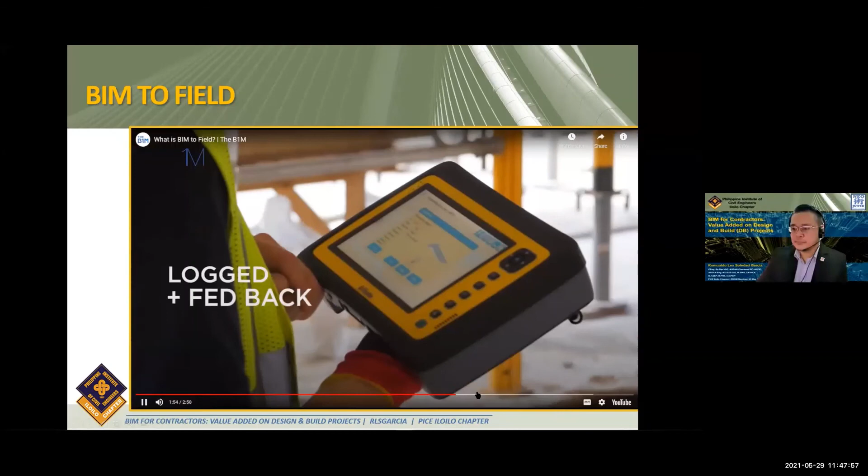But how do you transpose that highly accurate digital data into accurate construction in a real site environment? Well, traditionally, this is where the process has reverted to manual methods. Tools such as the robotic total station by Trimble MEP enable you to import model data to a handheld tablet device in the field. That data is then relayed to the robotic total station that provides accurate setting out from the information model using its laser measuring system to a tolerance of 2 millimeters. This technology corrects for points on uneven surfaces and locates wall penetrations. Any variations to the model data due to changing conditions on site can be logged and fed back as as-built data to the project team. Even just from an efficiency point of view, this enables one person to set out 5 times as many points as a 2-person team using manual methods.

Of course, the technology is operated by a person and uses model data that's been entered by the project team, but the chances for human error are greatly reduced. Beyond the setting out, there are a number of applications that enable you to take information models, access data for the space you're in, or record as-built data and feed it back to the model. Take away from this video not just an understanding of what people mean when they say BIM to field, but recognition of why it's important. What's the point of investing in that accuracy at the front end of the process if you don't use that accuracy to actually construct out on site? If you enjoyed this video, don't forget to share it with a friend.

Okay, so that's one product from Trimble. Now I'm going to show you, I think this one is a brief presentation by Leica. They're one of the major players also of laser scanner. So just to give us an idea, this is Field to BIM.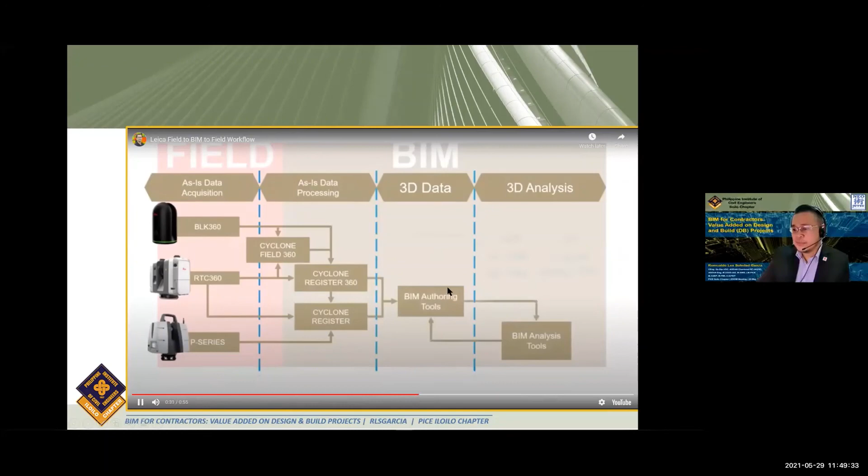So field to BIM: as-is data acquisition, as-is data processing, then 3D data and analysis. These are the three products usually presented by Leica, the Cyclone. Then it will be converted to be read by the BIM authoring tools or modeling tools using CloudWorx and Jetstream. Then you have the real world application, you have the IFC, and this, I think, is the Cyclone.

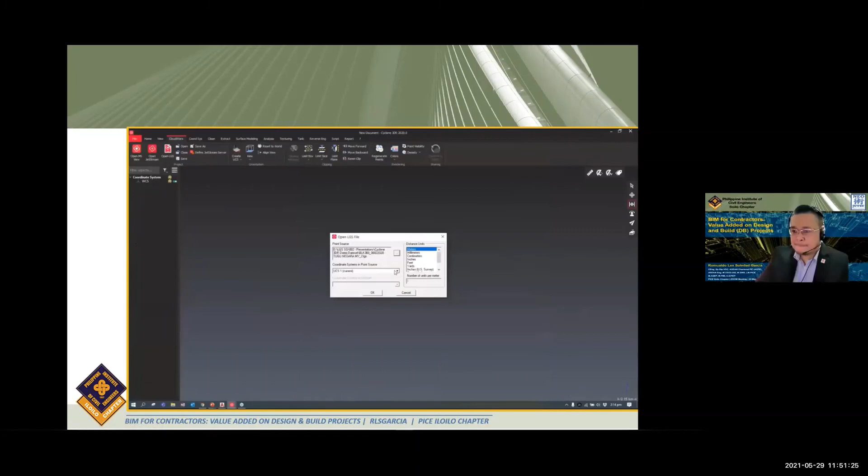I'm just going to pick this point cloud, right? So from here, what I'm going to do - this is for those of you that notice, this is one of the national monuments we have in Malaysia. So I'm going to click, go to the top view, and you'll notice that in order for me to align it, to orient it to my view, I can just go and click create UCS. I'm going to click 2-point. Now I can just pick, say for example, somewhere here.

So you can do the scanning, but you still need some post-processing. Somewhere here - limit box. This is one good example of how 3DR lets you work with this limit box. Now you don't have to go behind this surface here, you don't have to orbit behind. What you can do is, let's say for example, I want to adjust this.

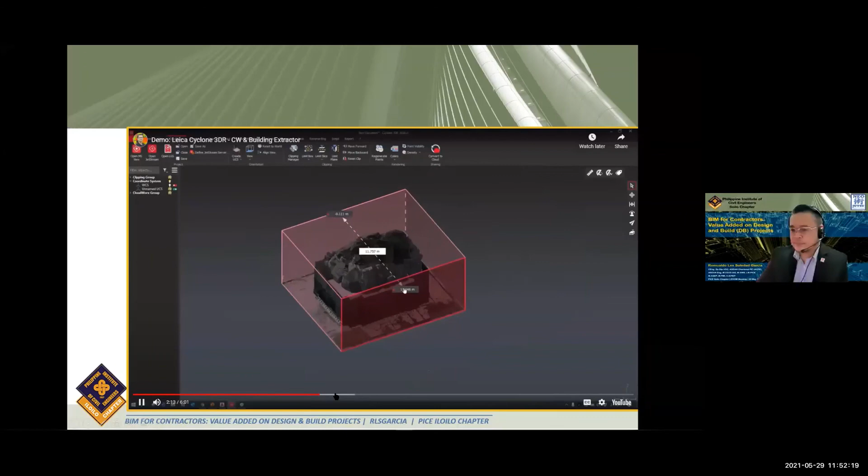Right, I just press - now, in order for you to work with this point cloud, you need to convert it into a Cyclone 3DR point cloud. So I'm going to click on that, and I'm just going to click OK. Now, before I click OK, you'll notice we have this function, image conversion. So what will happen on it? As for now, I don't have it.

Once I have this, the next thing I'm going to do is click and create a surface model. This is where I can use the building extractor. You click create, and it will model it and convert it into something usable in the authoring tools. This shows how intelligent the automation function is in Cyclone 3DR - just a few clicks and it will be created. So this layout is post-processed.

This is of that monument, and what we can do is send it over to AutoCAD. Before I go to AutoCAD, I'm going to put it side by side so you can see it. I'm going to click AutoCAD. I'm just going to select that outline, right click, click send to, click on AutoCAD, and it will automatically appear here. As some of you already know, AutoCAD is one of the software really good for creating documentation, etc.

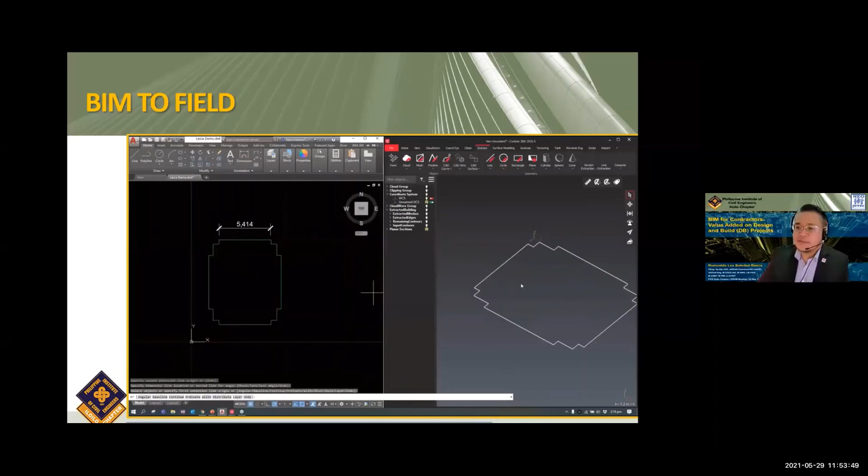So that is like a product. Then there's another clip just to show a bit of DfMA - interoperability between a few software. We're almost done, just a few more minutes. This is DfMA, design for manufacturing and assembly - one of the, again, getting traction using the 3D modeling accuracy or the BIM processes. So this example is GORE Engineering, I think this is in Canada.

So they have identified the benefits of manufacturing in an offsite environment, which increases safety. This is an Australia project.

So this is how they fabricate it offsite. That is phase 2, then the glazing and the cladding.

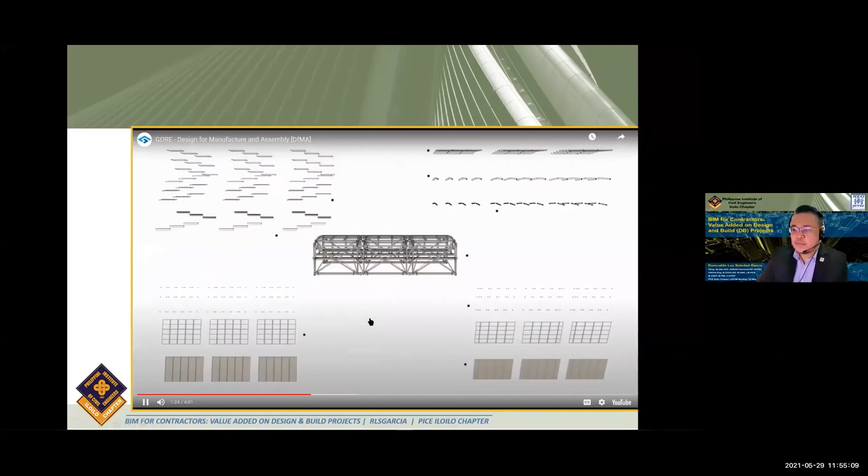Because of the accuracy of the software, and of course our skills as designers and engineers, we can fully utilize this process flow. So this becomes modular, and the only thing you need to do on site is more or less the lifting. The cladding is already there.

Some of the considerations here are the lifting weight, the size of your frame, and the angle. For this case, it is two sets of handling.

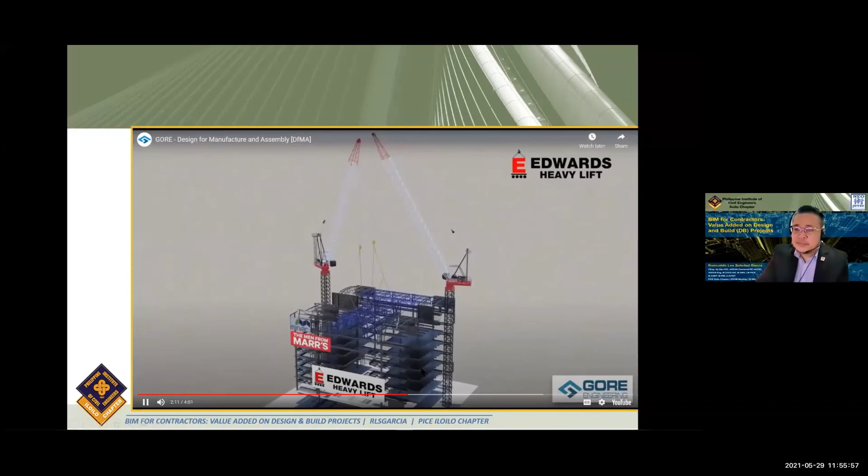So this is one example of the prefabricated design for manufacturing and assembly. The speed of doing things is really exceptional because of this process flow. But without the actual modeling, it's quite difficult, and the accuracy won't be met.

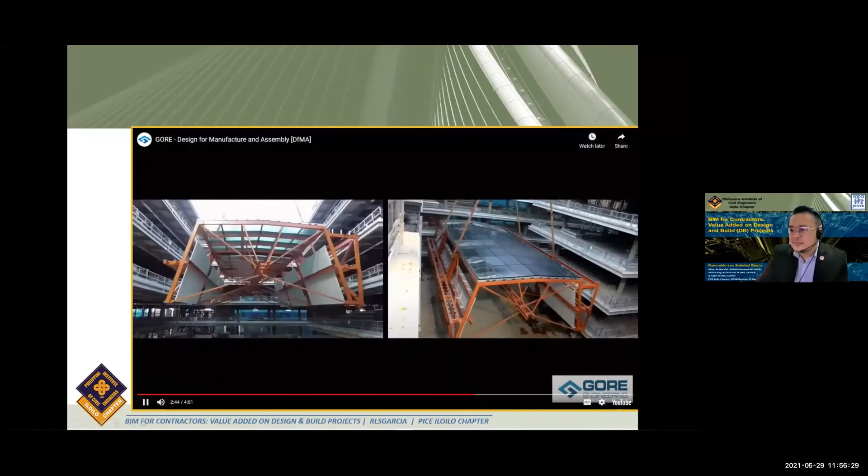So as a contractor, if you can think out of the box using this procedure with existing processes, it would be better, especially if it helps our project be constructed in lesser time and lesser budget. That means we're being more efficient, using only 2 cranes.

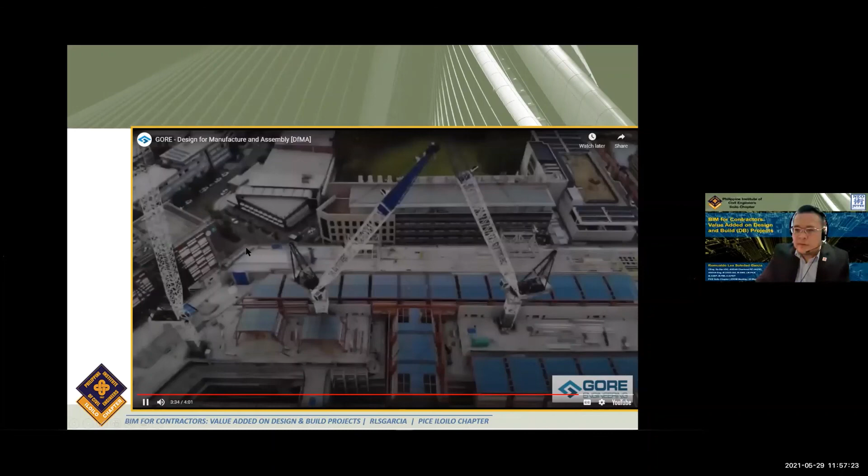Okay, and the PPVC—I think I have 2 samples here of PPVC. This is SoilBuild, one of the contractors here in Singapore as well. We could have a better understanding of integrated construction and prefabrication.

So they are utilizing Tekla. The Soilbuild Integrated Construction and Prefabrication Hub is a compact building consisting of 2 levels of production floors with a high degree of mechanization and an office on the 3rd level. We focus primarily on producing prefabricated construction elements, with an option to assemble them to form volumetric components.

The move to ICPH has enabled us to expand our prefabrication capabilities. Not only are we able to increase productivity substantially, we are also able to produce more complex components in a shorter period of time. SoilBuild is at the forefront of embracing digital technology in building a robust design for manufacturing and assembly ecosystem. Besides building more efficiently, we also need to start building more intelligently.

Tekla Structures, with its open BIM approach, gives us the flexibility to communicate with various project stakeholders and software languages, allowing for efficient exchange of digital information across the project value chain.

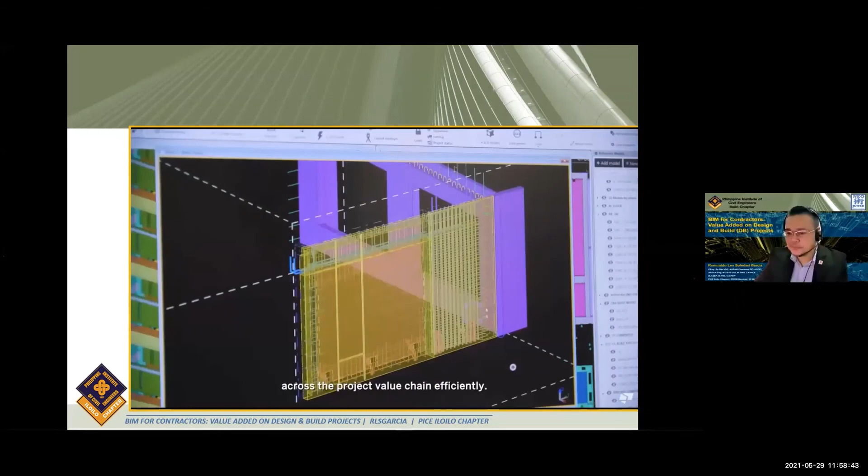Tekla Structures allows us to build up the level of details in the BIM model according to the design requirement. Digital information can then be extracted and exported in formats that enable BIM modelers to collaborate outside the engineering office with the production crew, and eventually with site installers, through the same digital information produced from the high LOD Tekla BIM model.

Basically, models are enlarged and analyzed during meetings to remove any potential problems that may arise during the production stage. Doing so ensures a smooth process throughout the production cycle, from start to finish. Once the model is approved from an engineering perspective, it will then be released for production.

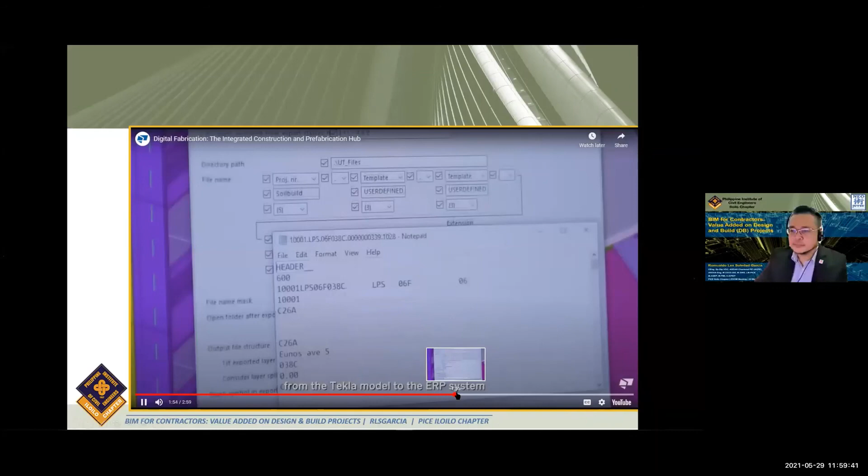The Tekla constructible model contains all key information of the elements needed for production and tracking purposes. Data is converted and transferred seamlessly from the Tekla model to the ERP system, and then over to the master computer system, facilitating the flow of information and creating a complete and wholesome production cycle through automated circulation in the plant, with files sent from the model.

The Tekla system further allows dedicated user access rights and a tracking system for accountability purposes. The Tekla support team is also very proactive in continuously improving the software and customizing it according to our local needs.

Working on design solutions is now less tedious and more systematic. Tekla provides a platform where collaborative sharing can take place. ICPH enhances our image to innovate and adopt new technologies.

Okay, let me end this session with this video from PPVC.